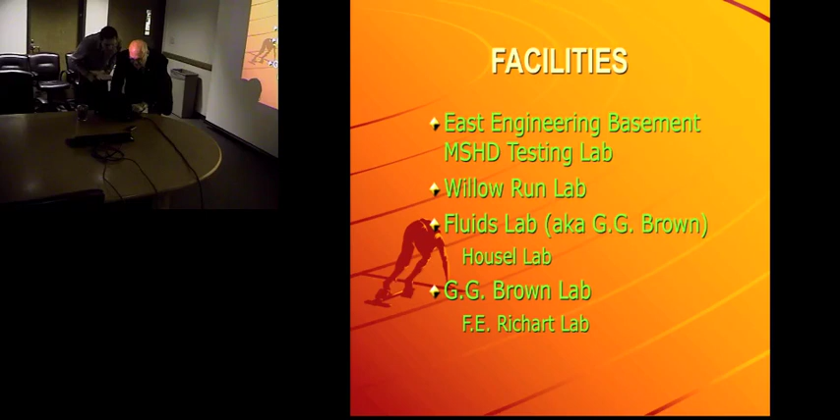Now, some of Housel's major contributions dealt with how do we measure strength in these soft lacustrine clays. The principal way that he wanted to do it, or learned to do it and promoted, was the double ring shear. We'll see a picture of that in a minute. He moved on beyond that to something he called a stabilometer. Translate: triaxial. But of course we know triaxial is not true triaxial because it's an axisymmetric problem, and we have only two stresses to deal with, and that's what the stabilometer dealt with also.

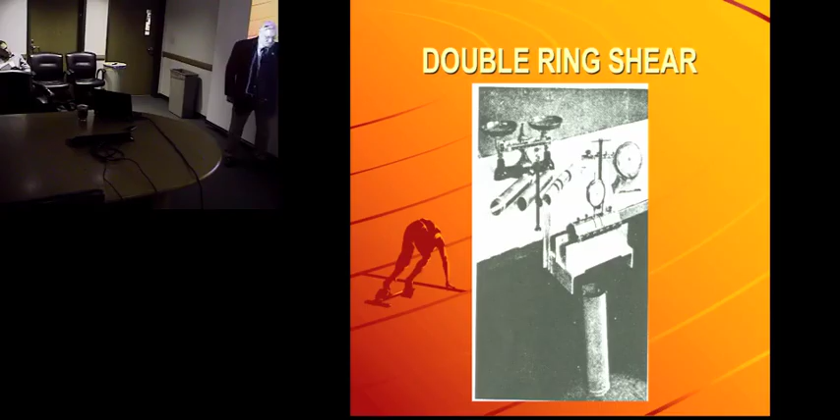The sample is collected in a thin wall tube that has three segments. Generally, you push or drive the sampler into the ground, and the clay comes in here. Then this portion is mounted in that kind of a bracket, and on the bottom of this center ring, there is a place for a hook and a container, and he just used lead shot. You put more and more lead shot in until it fails. And so that's the basic concept.

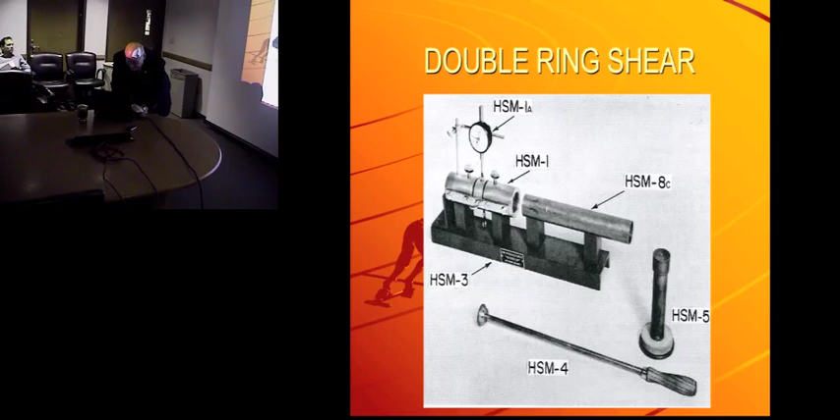And here is a little better, sharper drawing. This is simply the process of pushing a tube in, getting the central ring under this rigid portion. Here is the hook. And so you can watch displacement and force by adding up all of the lead shot. And here are various containers for lead shot, depending on how strong, how big the container is going to have to be to cause it to fail.

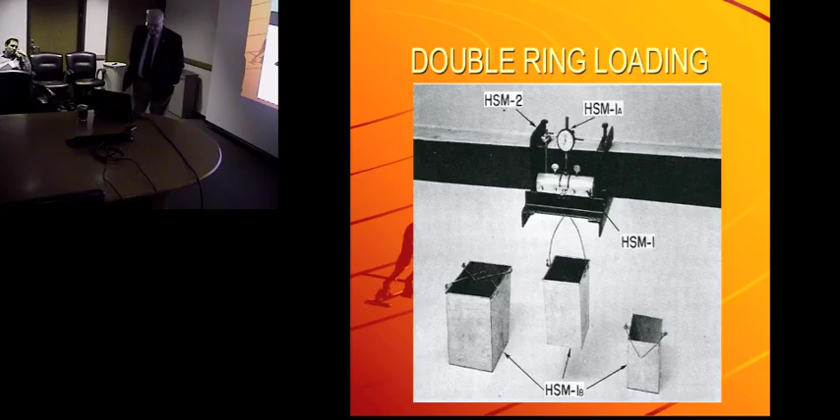Now, you'll notice that there is no stress applied in this direction, and it's independent of confining pressure. So it shears along two circular surfaces, and you can compute the area of those and the weight, and we get a shearing strength. He used this approach to find shearing strength for bearing capacity calculations.

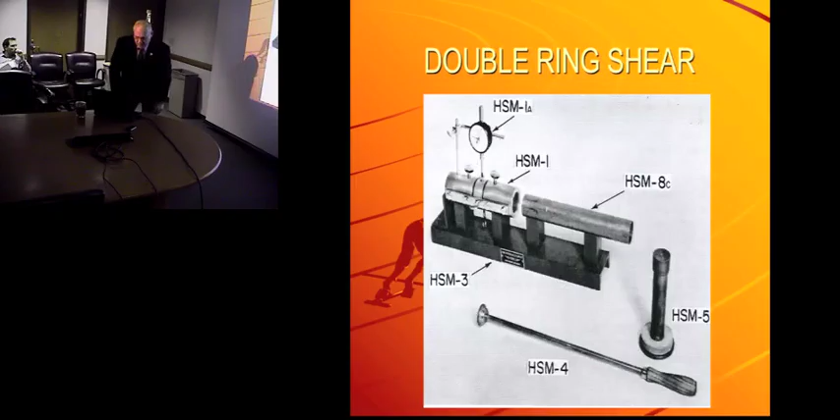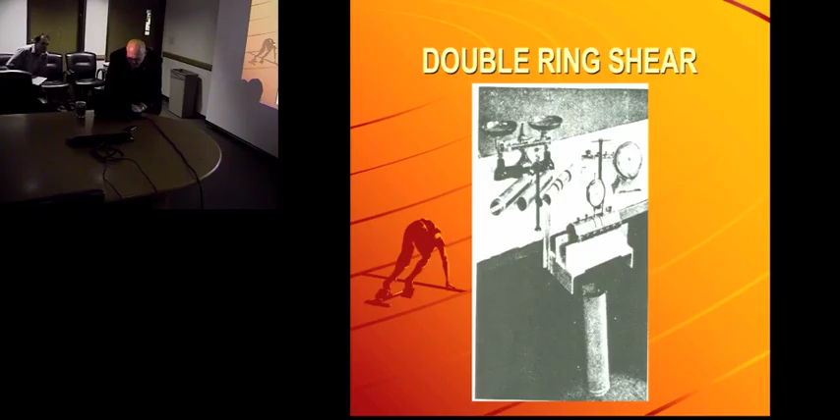The next step then - why are we going backwards? Can you click here? Yeah, but we were just there. Okay.

The stabilometer - probably the best view for understanding it is the lower right-hand corner there. And of course, Housel was doing a lot of pavement work, and it looks to me like this is an asphalt specimen in there with aggregate and asphalt binder. But he used the same thing for soils. And of course, he had a rubber membrane around the sides. This was a metal cylinder.

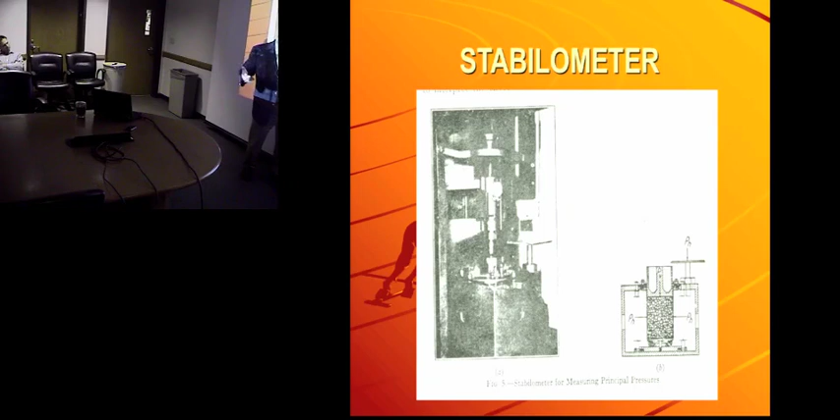We have a version of it in the lab, you can see if you're interested. The load is applied here through a common testing machine. And the cell pressure was applied by putting loads on this piston. The piston communicated with the cell water. And so sigma 3 was applied by putting that load on.

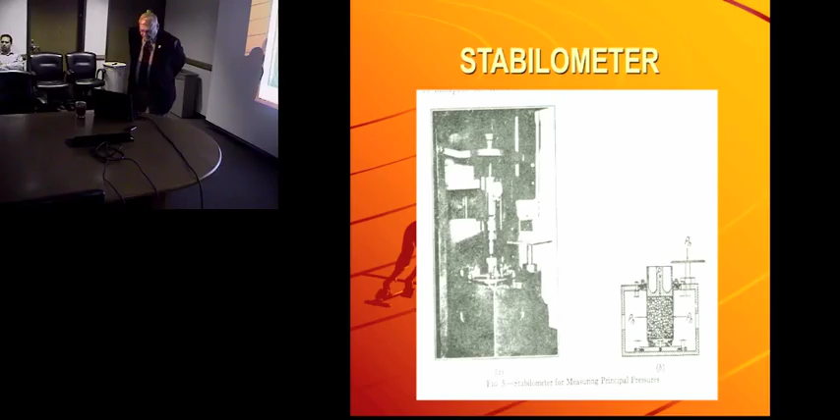And of course, this is a pretty robust chamber, so it could be used for the asphalt testing as well. Okay, now let's see if that'll move forward. All right.

The Housel penetrometer, miniature penetrometer. Well, you say miniature—this is about 3 feet tall, but the penetrometer itself is here, and it looks like this is in backwards. It really doesn't matter.

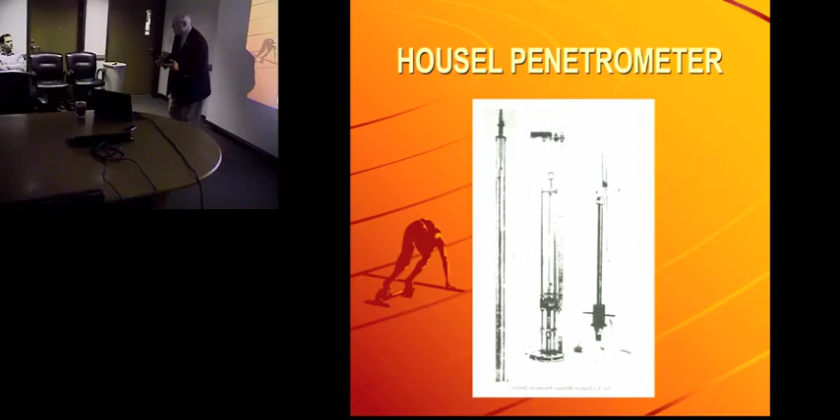Then the weight is picked up here and dropped. This is the version that could be taken down in a caisson, but it used the same approach in the lab to build specimens and learn how strong you could get them. So here was a version for the lab, and I'm not even sure how to describe that element.

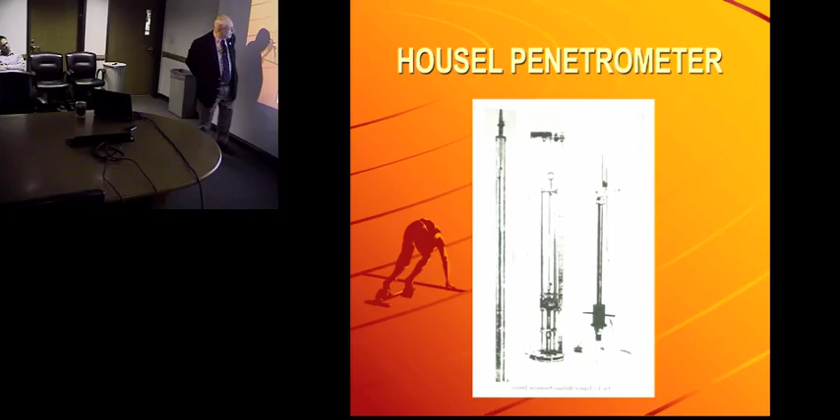But the next slide here, we get it? Okay, this is all of the framework. This is the actual sampler. Inside there is the sleeve, the segmented sleeve, 3 pieces to it—1.25 inch pipe, sharpened at the end, driven with a 20-pound weight.

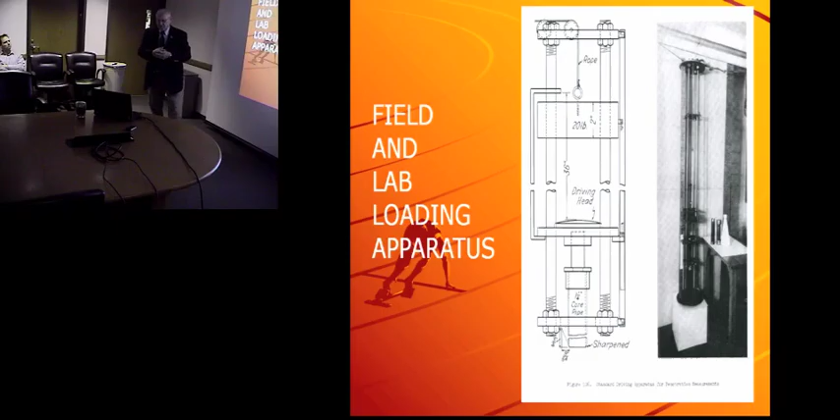It was light enough that you could take it to the field and one person can operate it and so forth. I have used this device to test at the bottom of caissons, which was sort of the intended purpose for designing this apparatus.

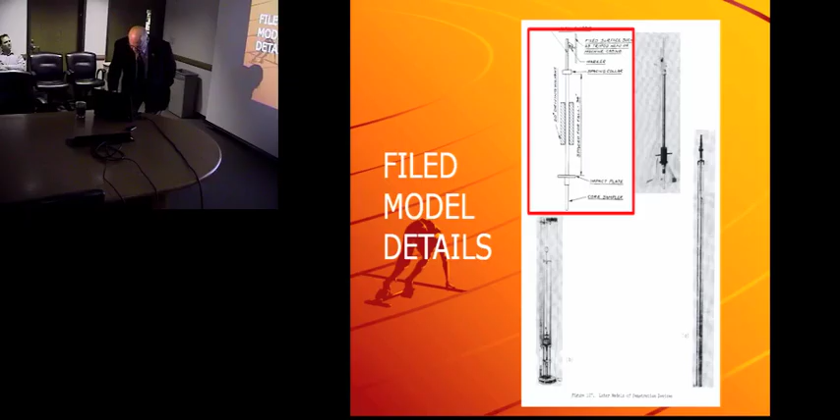So here was the simplified view. I think the last one that I used I had to borrow from SME. I think they have the last one operational in southeast Michigan. I don't know where anybody else would use it, but in any case, I used this for testing the rock at the bottom of caissons that supported Corning Incorporated's devices for manufacturing optical fiber.

Well, Housel developed a bearing capacity theory, and here you see the mechanics of it. If you'll just blink and say 'I understand,' that's as far as you're ever going to get, I think. But in any case, you see the various elements, and there is shear on all of these surfaces—the S sub C, which is the cohesion that he measures from the double ring shear device.

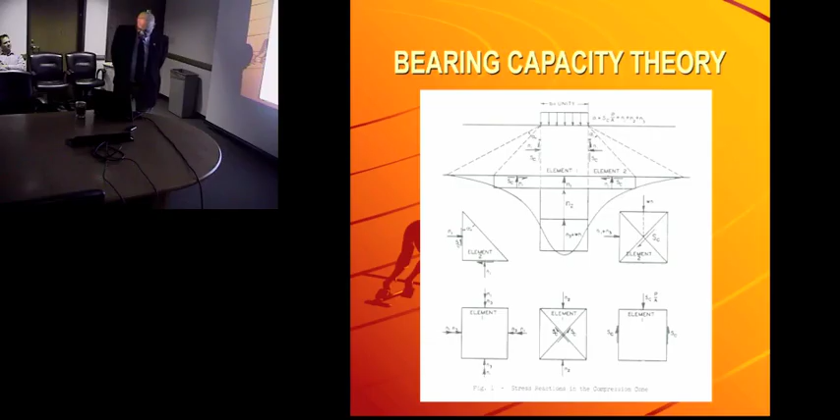He says that he developed the theory based upon these photoelastic models. In the late 40s and 50s, and maybe earlier, photoelasticity was an important experimental tool. Probably few of you have ever dealt with photoelasticity, but some materials are birefringent, and they refract light at different angles based upon stress. So this is a bakelite, a clear plastic type material model, illuminated with as white a light as you could get at that time, not laser, of course.

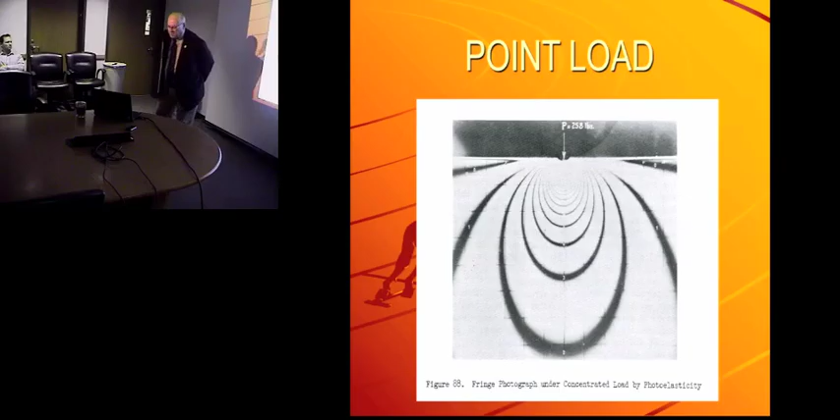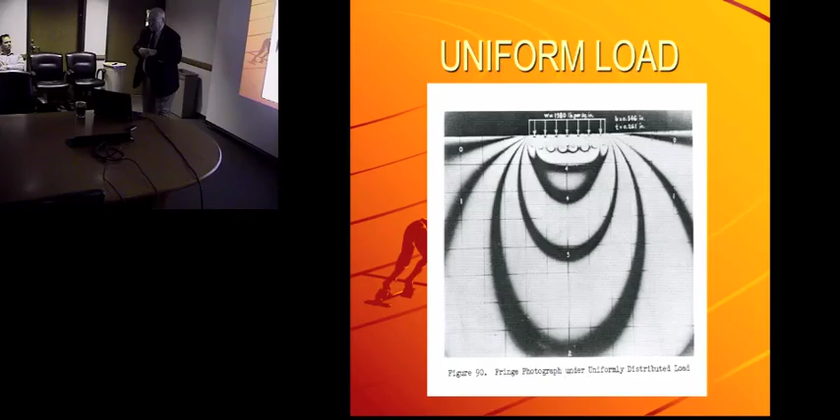Here is a concentrated load, and the stress is developed. Then in an attempt to create uniform load, we see multiple points, and I think this is an interesting photo, because here we see all of the individual point loads, but when you get a certain distance away, we get right back to the same basic shape as the individual loads—is that St. Venant's principle? Yeah, that distributes the load.

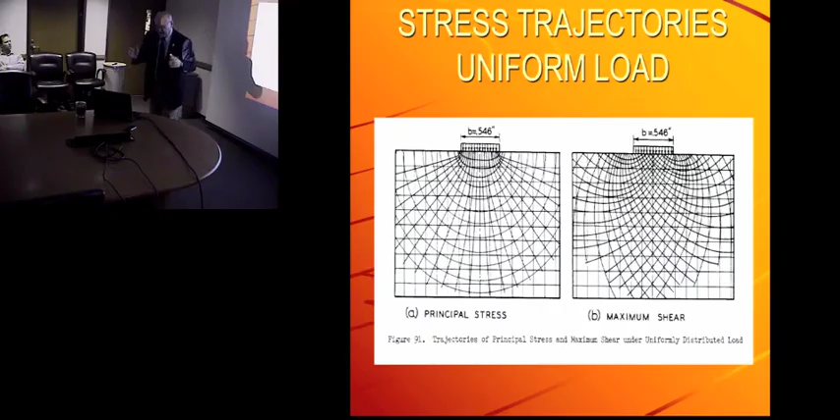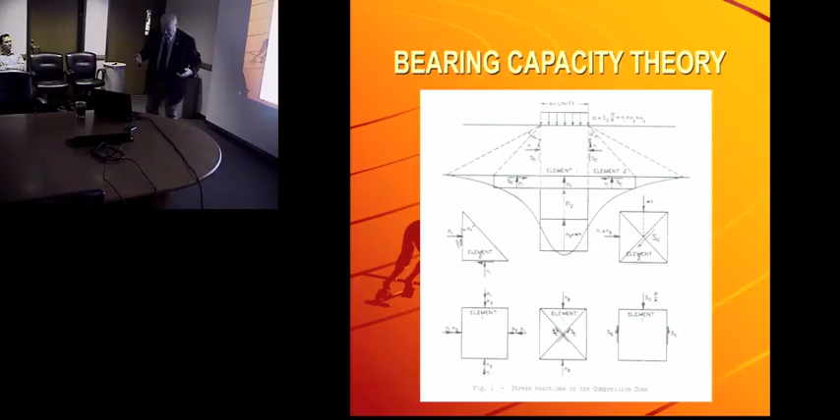Housel looked at the principal stresses and the shearing stresses, and I cannot go from this to his theory, so we're going to just bypass that, and I show you again his basic explanation for the equations that he derived. They are not particularly widely used; however, you will find some people with Wayne County who still know about them.

So here's the load over the area, stress, and 4 different terms, and the terms take into account sort of the same sorts of things that Terzaghi does, but I'm not going to try to explain them any further.

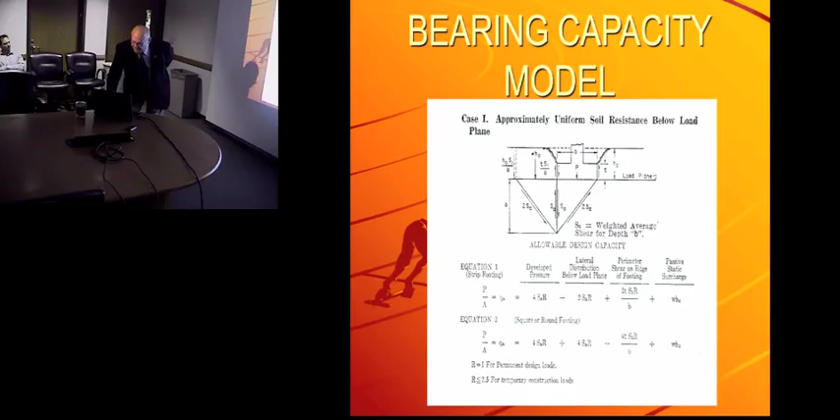Now, Housel did not publish a lot except in engineering reports to the Michigan Department of Transportation and Wayne County—not very many widely publicized research papers. However, he did write a laboratory manual for soil testing, describing how you'd use his stabilometer, his double ring shear, and even the miniature penetrometer.

And he was writing 'Applied Soil Mechanics.' Edwards Brothers were signed up to publish it, and they published a little bit in '38, a little bit more in '55, a little bit more in '60, never more than that. I have the last version, the 1960 one, because I took his course in 1964, and that was the version we were working from.

Now, Housel had some quite famous disciples. Donald Berry, probably the most well-known, a very well-known transportation professor at Northwestern University, retired only a few years ago. We have Donald Berry's thesis downstairs, if anybody wants to look at it, in which he used the stabilometer.

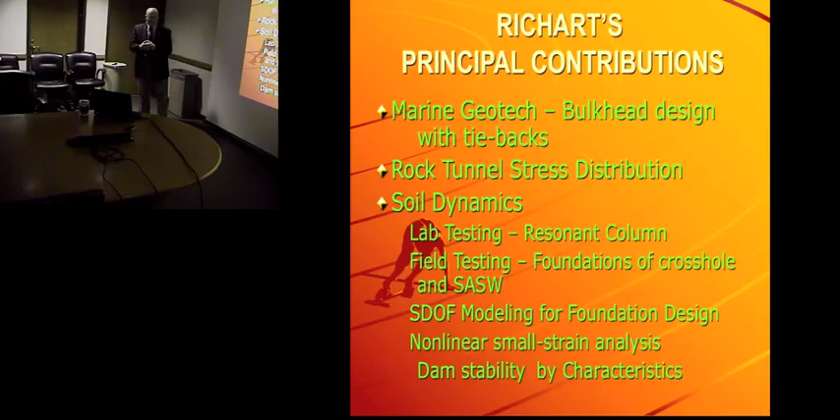In soil dynamics, he really got the world started on resonant column testing. It had been done first by the Japanese in the 30s when they were trying to use cellophane as the confining membrane. They had a lot of trouble with that, but the concept was there. It was picked up by Shannon and Wilson, a consulting firm in Seattle, Washington, and the Corps of Engineers in the late 40s and early 50s. Richart then picked up on it at the University of Florida, particularly with Hardin and Hall, and then work that continued on here.

Field testing—he was quite insistent on making tests in the field, measurements of shear wave velocity in the field to compare with what was measured in the lab. Essentially he was setting the foundations for cross-hole seismic, SASW, and MASW—all those things that have followed on.

He really got started the investigation into how do you design footings with single degree of freedom systems, and the work of John Lysmer, who first did single degree of freedom systems with constant coefficients—that is, constant properties, frequency independent properties—which we also learned was not quite right, because the stiffness and damping of soils is frequency dependent. So then the impedance compliance people came along and worked that process for foundation design further.

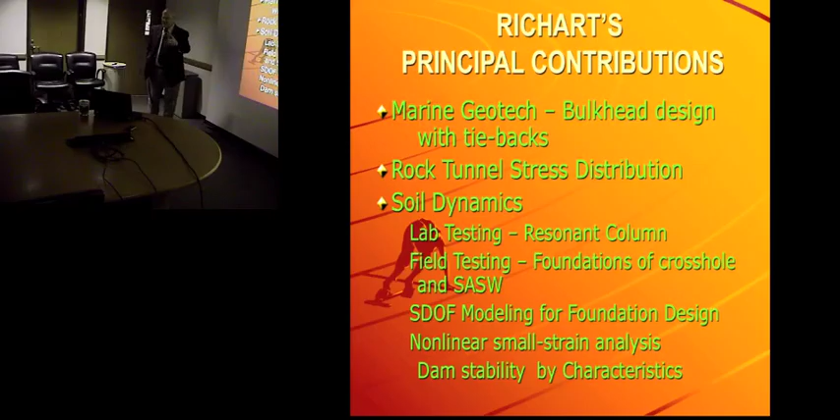At the same time that Seed and Idriss and the group on the West Coast were defining the strain dependency of shear modulus and shear wave velocity, he was promoting that with resonant column work here at Michigan, particularly with Drnevich's work on resonant column.

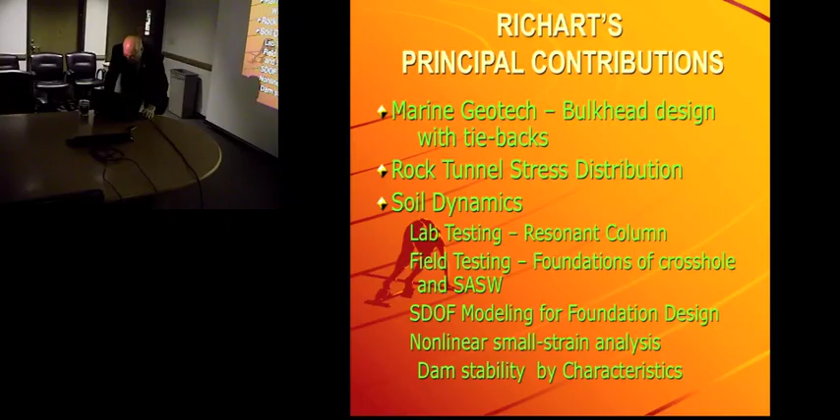He also worked on dam stability for the Corps of Engineers, along with Professor Wylie, who was on our faculty here.

His book—he was certainly the inspiration for, and the principal author of, really the first textbook in the United States, Vibrations of Soils and Foundations, and that text persists to be a good foundation for starting into examining soil dynamics.

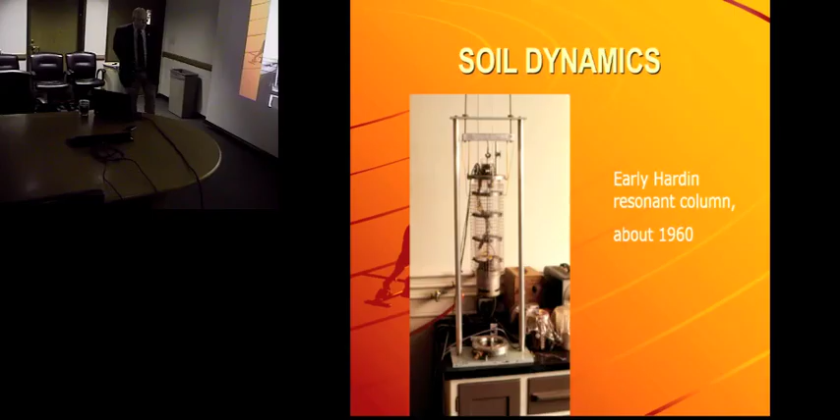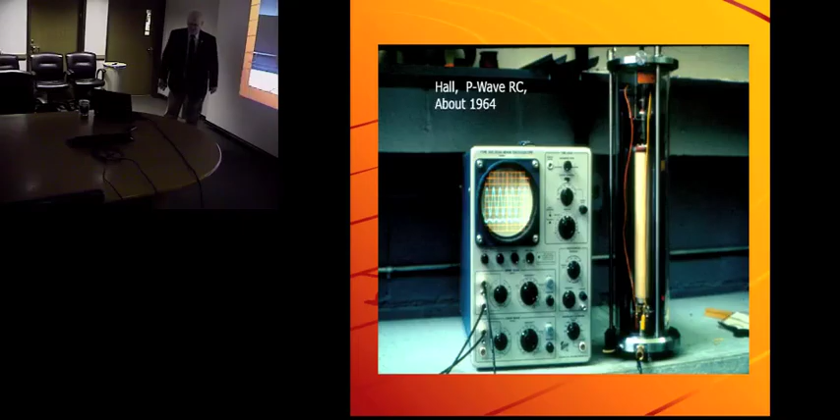I'll just move these quickly through the soil dynamics work. First started probably in the late 50s actually, but this device would be around 1960 at the University of Florida—Hardin. Here is an early device by Hall, and you see how long the specimen was. At that time it was thought necessary to have a long specimen. This one happens to be driven vertically for primary wave propagation, but there's a similar device for shear.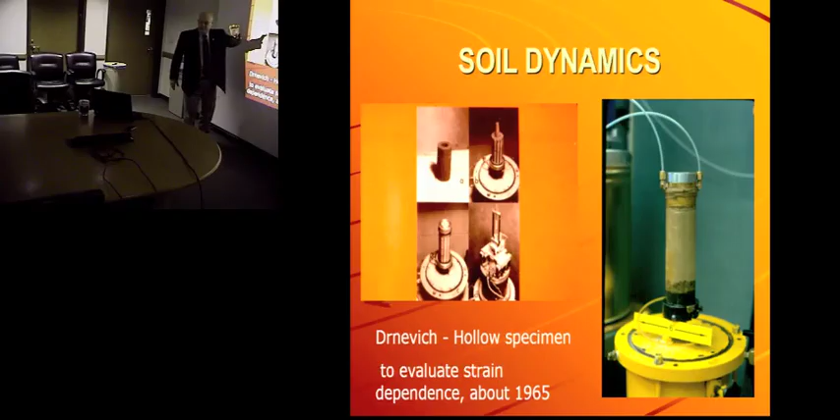Then to look at the importance of shearing strain amplitude, Drnevich developed the hollow specimen. This is what the early device looked like—a hollow specimen, and the clay specimens were developed by drilling a hole through the specimen. The key then was how do you get the membrane in the center and drainage strips, and here the specimen is ready, and the apparatus.

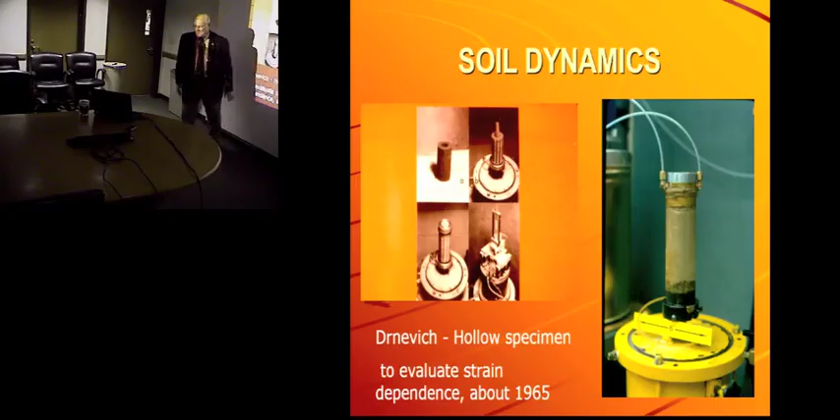But here you see a young Ken Stokoe holding a specimen, drilling it through with a wood auger. This is K.Y. Lin, one of our students who went on to work in Palo Alto, California, and I think he is still there. The only thing that I have to admit for Lin was...

Until we let his wife play with us, he was the champion at ping pong. As soon as Chris, his wife, started, she was so much better than the rest of us, we all had to quit.

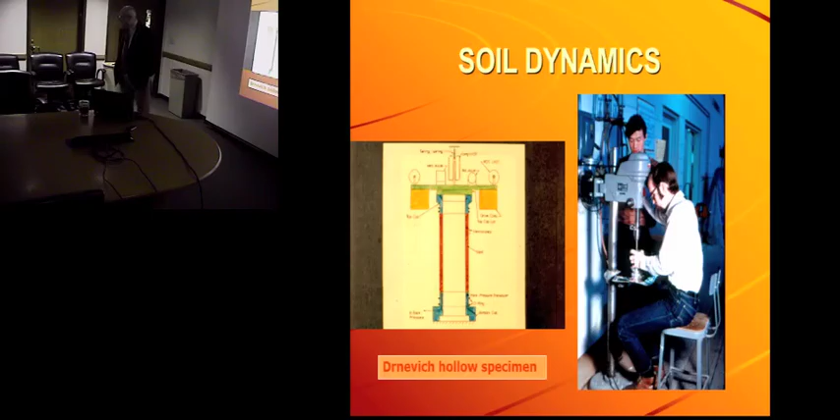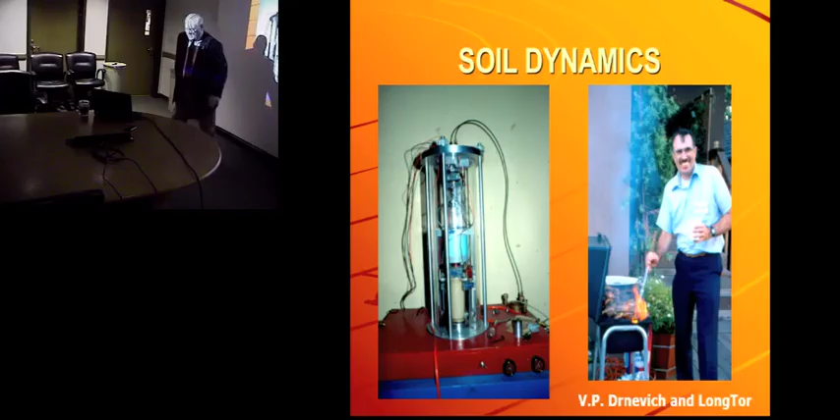Drnevich—here is the LongTor device, resonant column, both torsional and longitudinal on the same specimen at the same time. This is the Hardin oscillator, which drives it for resonance and torsion, and a longitudinal drive mechanism for the axial. And there is Professor Drnevich, 20 years ago, I guess.

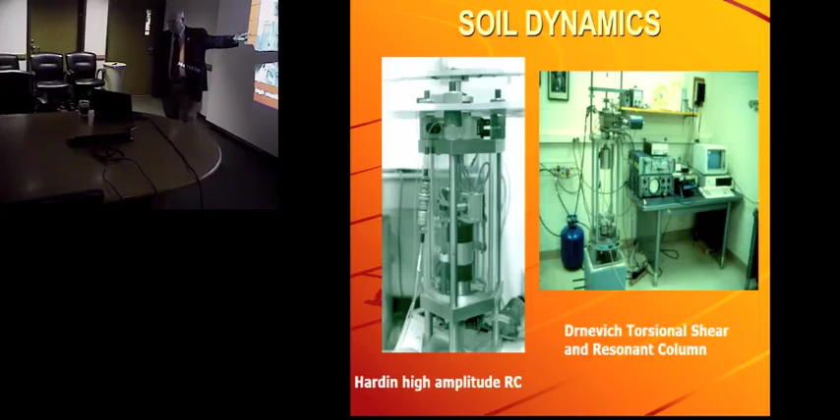Additional resonant column equipment—a high amplitude device by Hardin. Hardin did this while he came to Michigan on a summer appointment with Bill Richart around 1961. And here, I guess, is probably the most sophisticated of the devices we have now—the Drnevich torsional shear and resonant column combined. It's showing rather old electronics, and the last time this was fired up was more than 10 years ago. But in any case, that's an important development in the resonant column devices.

Bill Richart received many honors: the ASCE Terzaghi Award, the Terzaghi Lecture, and membership in the National Academy of Engineering.

A few other members of the geotechnical community who have given the Terzaghi Award or Terzaghi Lecture include Jorj Osterberg, D'Appolonia, George Sowers, I think Cook, and Bramlette McClelland.

So then we can finish off with some of the other faculty who have taught in the geotechnical program. Jack Hall, of course, was Bill Richart's student. He came to Michigan about the same time I did, and I took courses with Jack. Jack really was, I think, the founder of our field work, very insistent on the practices in the field, and he developed resonant column devices. He went on to be a practitioner with D'Appolonia Associates, and then Stone and Webster. He's currently still teaching at Worcester Tech in Massachusetts in the Department of Civil and Mechanical Engineering.

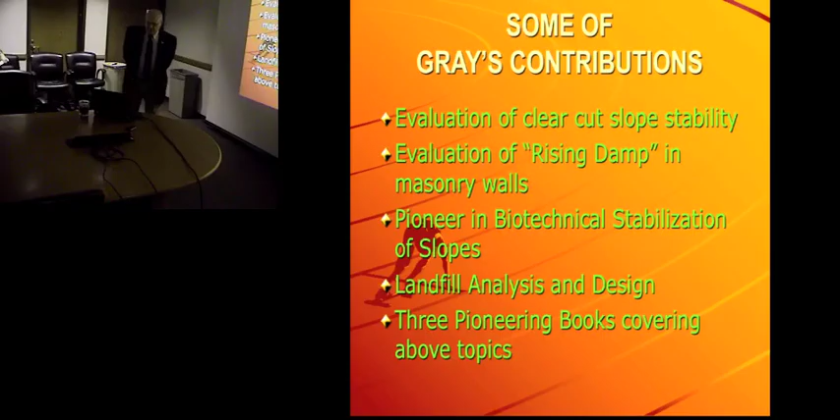Don's contributions include the evaluation of clear cut slopes. At one time, I don't know how often it's going on now, timber companies would come in and take all the timber off a mountainside, making it very subject to landslides. Also the evaluation of rising damp in the UK - a lot of old masonry buildings where moisture would move up through the walls by capillarity and deteriorate them. But he's probably most famous for the last two: biotechnical stabilization of slopes, and landfill analysis and design. He has books on these last topics.

Three of his principal books here with the co-authors associated with those. And I've been here since '64 and on the faculty since '67, and retired a few years ago. Some of the people I feel I've worked with closely are Ken Stokoe principally, and Wolfgang Haupt.

I worked with Haupt both here at Michigan and in Germany. I spent about half a year at Karlsruhe University in Germany. Chung-Soo Chan and I worked on building a large quicksand tank, which has subsequently been destroyed, but we did a lot of testing on that. George Athanasopoulos and I did quite a bit of work on full-scale testing of piles.

Dennis Hiltunen was one of my students who, along with Nenad Gucunski, who came after him, really developed on Ken Stokoe's SASW work and expanded and improved upon that operation.